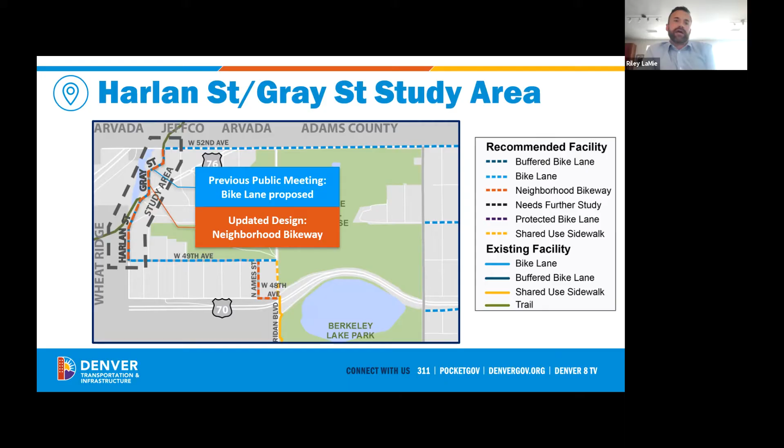Next slide, please. Just a reminder of what street we're talking about tonight: we're looking at Harlan and Gray Street between West 52nd and West 49th. That's the project area, and this is just to remind us of the street we're discussing. What triggered us talking about Harlan and Gray Street is that the street is being repaved sometime during the summer. So I want to recap what was presented at the March 11th meeting on the next slide.

We held a public meeting on March 11th to introduce a bike mobility project that was being coordinated with our repaving. The intention of that meeting was to share a design concept as an idea, and then share ways that you could provide feedback to us through email, through the chat, as well as through the phone. And we did get a lot of feedback, so we'll talk about what that looked like in just a minute.

At that public meeting, there was a bike lane concept that was shown as an idea, and from that we received a lot of input. Some of it was from verbal comments that we got during the meeting, some was from chat, and some was through email that we received over the past month.

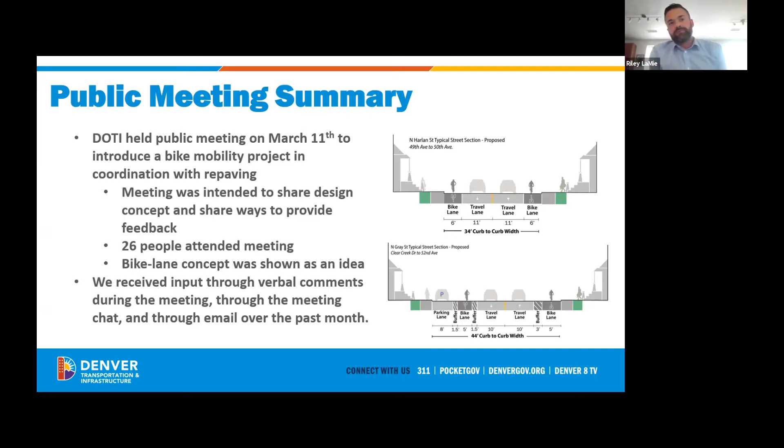On the next slide, it captures what we heard. We heard a lot of comments related to pedestrian safety. There was also a lot about how we can improve safety for all modes, not just bicycles, but how can we make traveling on the street feel safer for everyone. And then there was a lot of general opposition to the bike lane design that we proposed and presented — we'll talk about how we're going to change that in a minute. There were also some concerns about wanting to keep parking on both sides, which we recognize. So those are the top comments that we got.

We also received quite a few comments about some challenging intersections, and that's the summary of what we heard. Some examples of the comments were that the street's already working fine as a shared condition between the people that use it today, such as bikes and pedestrians. There was even a comment that sometimes people riding horses go down the street because of the connection to the Clear Creek Trail.

We also got a lot of comments about improvements needed at intersections, definitely some additional input about missing sidewalks between 49th and 51st, and another comment that we'll address later tonight about the need for improving the crossing at 52nd and Gray Street.

There were also a lot of comments about how street parking on both sides of the street is utilized for visitor parking, and some other concerns about vehicles running stop signs at Clear Creek and Gray Street intersection. Finally, there was some mention of the Clear Creek Trail Master Plan, which will be filling in that gap in the trail in the future.

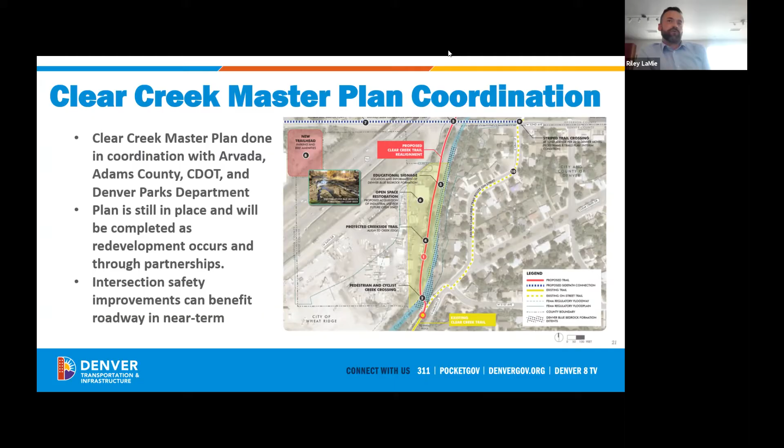That's why, to address the comments we're getting in the near term about improving safety on the street, we're looking into making some intersection improvements to benefit the street in the near term. I'm going to pause there for any questions or discussion before we get into the next part. As a reminder, you're able to unmute yourself with the button, and if there are questions in the chat, we'll try to get to those.

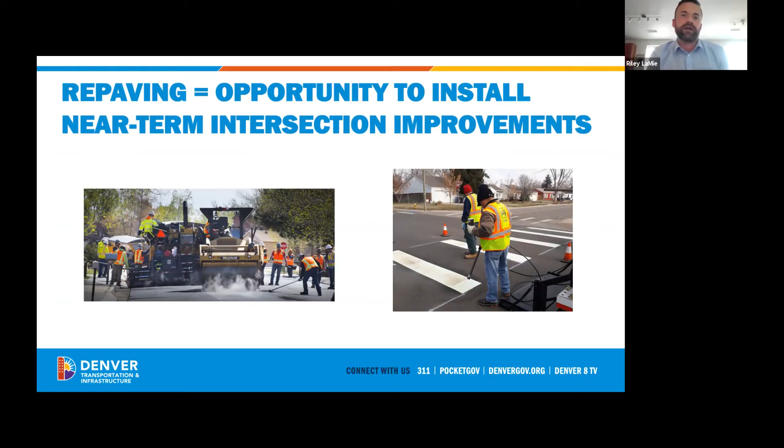As I mentioned before, a lot of the Inspiration Point neighborhood is on our schedule to be repaved in 2021. We try to repave the entire city about every 8 to 10 years or so. When we repave the streets, it's an opportunity because it refreshes the pavement and we have to go back out and redo the striping. That's what you see in my picture, one of our crews adding in a marked crosswalk. So that's an opportunity to do some improvements at the intersections as part of the repaving, and that's why we're here to talk about some improvements.

The first one I want to talk about is at Harlan and 50th. I know we heard a lot of comments about this particular intersection. One thing we're looking at doing, or at least is proposed, is adding a new marked crosswalk and what's called a stop bar. The purpose is to improve the visibility of pedestrians in the intersection, and it also alerts drivers where they're supposed to stop their car, helping navigate the intersection a little better. These are things you probably see in a lot of other parts of the city, and as part of the paving project we'd be happy to add them.

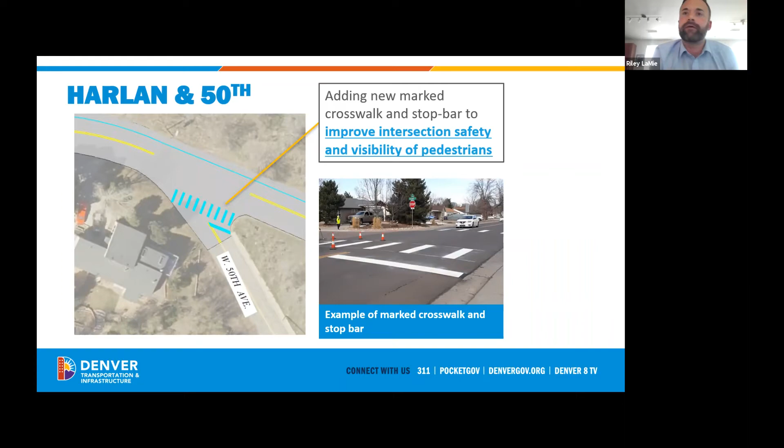Another one is Harlan and 51st, and I know there was a comment on this. We're also looking at adding new crosswalks as well as stop bars at this location. Harlan and 51st is where the street merges or intersects with the Clear Creek Trail. We heard a lot of comments before about drivers not seeing the stop signs, and also about bikes blowing the stop signs and coming through. We're hoping that marking the crosswalks and adding stop bars makes this more visible as an area you're supposed to stop at, and it'll also help improve the visibility of pedestrians in the intersection.

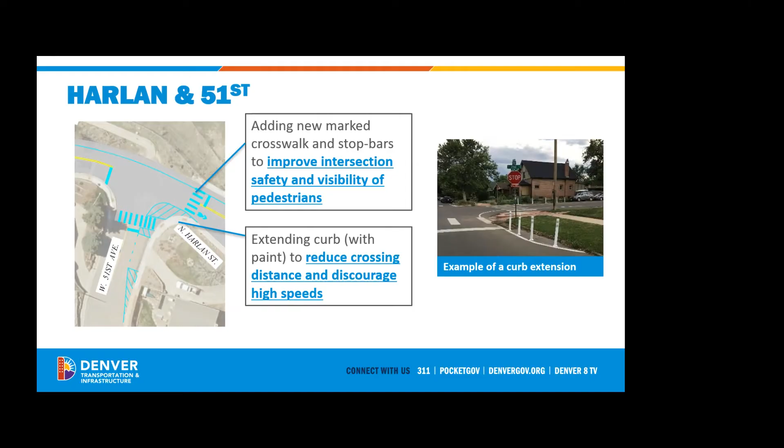Excellent, thank you. No problem. Bob, I see you had your hand up as well. Sorry, Bob, you're still muted. I'm gonna ask you to unmute, Bob, there should be a box that pops up. Okay, feel free to type it in, and we'll try to come back to you, okay? Sounds good, sorry about that.

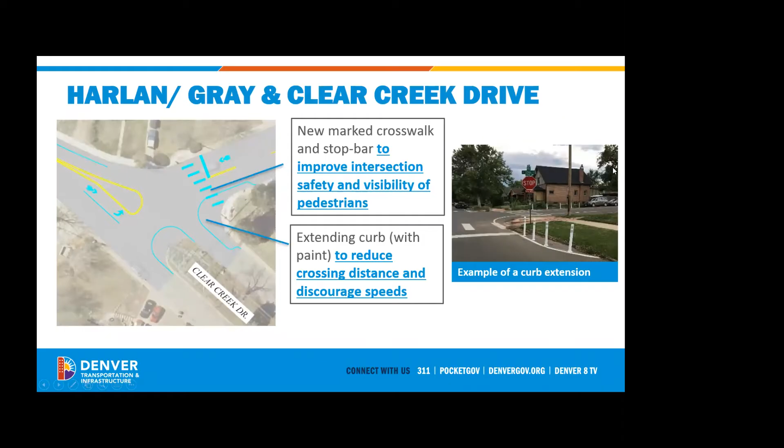All right, if we go to the next slide, we'll go to the next intersection. The other thing we're looking at doing where Harlan, Gray, and Clear Creek Drive all come together is the same thing, adding additional marked crosswalks, as well as the stop bar, again just to help improve visibility at the intersection.

We're also looking at adding a curb extension, basically expanding using paint and posts, the median where it says Clear Creek Drive, as well as that corner on the right of the picture. This would effectively narrow the intersection a little bit, helping to show drivers as well as people riding bikes where they should be when making a turn. These kinds of treatments, where you narrow the roadway, have been shown to be effective at reducing speeds, so that's something we're looking at doing there.

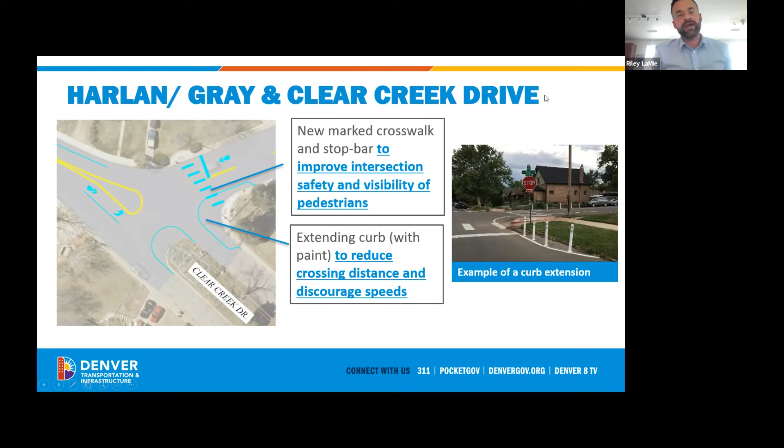What that does is it actually has wayfinding on it meant to help pedestrians and bikes navigate. So we're proposing to add these at three different locations: one where the trail crossing comes out on the street, another at the intersection where Harlan, Gray, and Clear Creek Drive all come together, and finally at 52nd and Gray. This wayfinding signage will hopefully help navigate bikes to where they're supposed to go, since we'll add that the Clear Creek Trail is to the left, or north, if you're coming out of the trail.

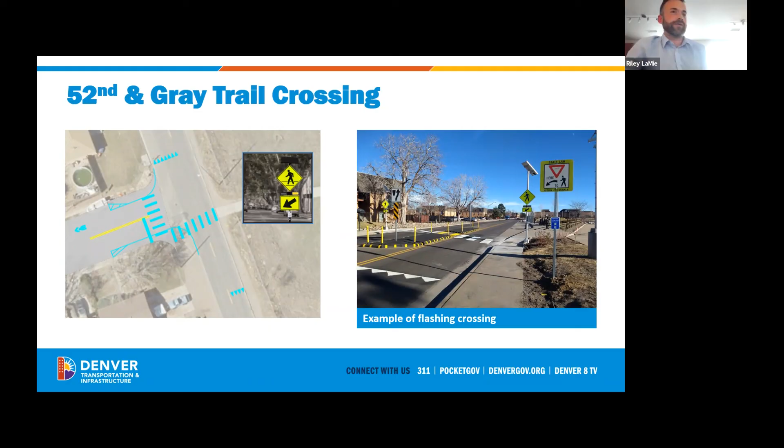I think something I've heard other places do is have some sort of marker, like a yellow marker next to a speed cushion, that alerts a snowplow driver they need to lift up their plow in that little section. So certainly something we're going to be learning from, and part of why we're looking into it as a pilot.

I'd add that the armadillos are probably similar to the rubber curb stops shown in the picture here, although they're intermittent instead of continuous. It's an added maintenance cost, but Denver is figuring out how to make it work.